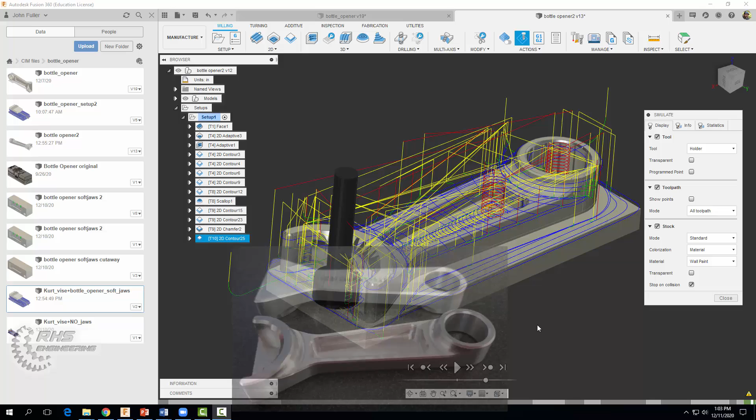Hey everyone, welcome back. In our last video, we learned how to manufacture the bottle opener seen here with our first setup. In this video, we're going to carry on where we left off and start a second setup to remove the material here along the bottom of our part, engrave our text, and add some chamfers here along the bottom. So let's go ahead and get started.

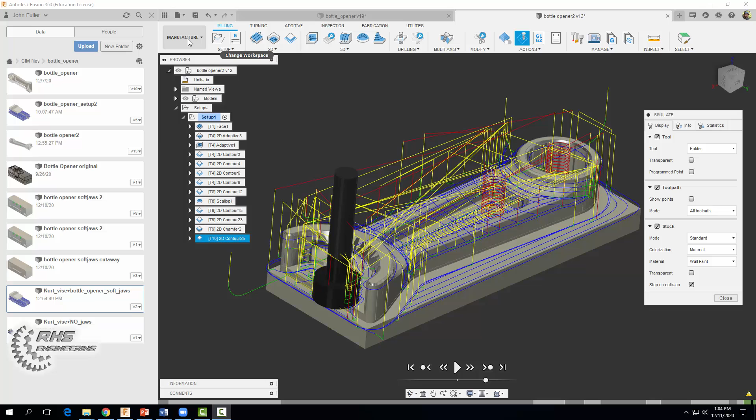The first thing you want to do is come back up to design. We want to make sure that our sketch where we engraved our text here is visible. So I'm going to check this eye right here so we can see the text along the flat surface here of our bottle opener.

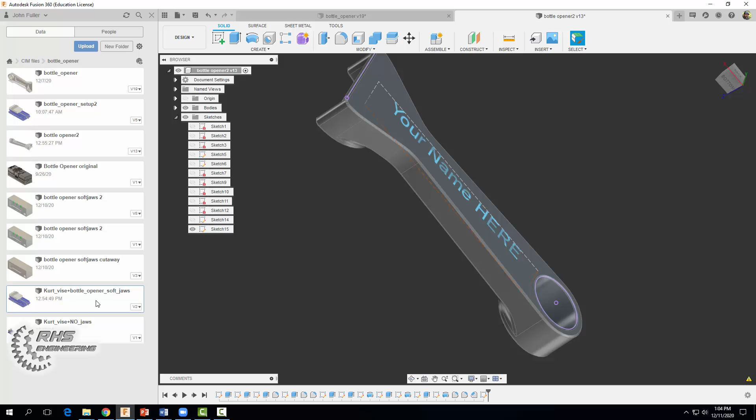Now, the next thing you want to do is come over here, download and open up our Kurt vise bottle opener soft jaws. So I'm going to go ahead and double click on that now.

All right, once your file is open, let's go ahead and bring in the bottle opener file here. So I'm going to right click, insert into current design. And I'm going to sort of move it into position here.

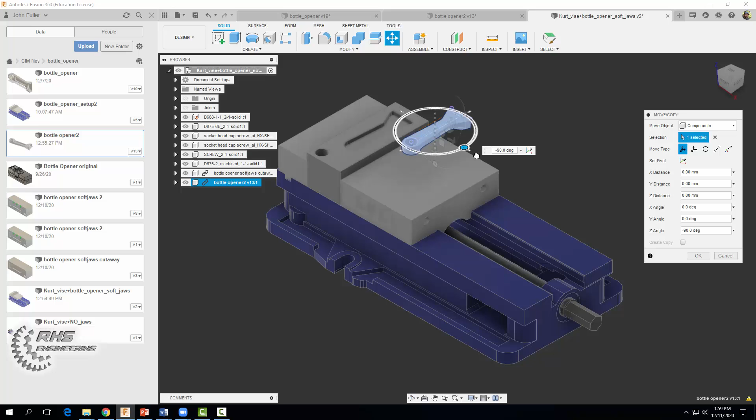I'm going to flip it in this direction 180 degrees and then rotate it around here 90 degrees, and I'm going to sort of place it so that it looks like it's going to fall right into the soft jaws. I'm going to move it up though just a little bit.

Hit OK. Okay, so listen carefully please, because if you don't assemble this properly, it may affect the outcome and quality of your part. So let's go ahead and assemble this.

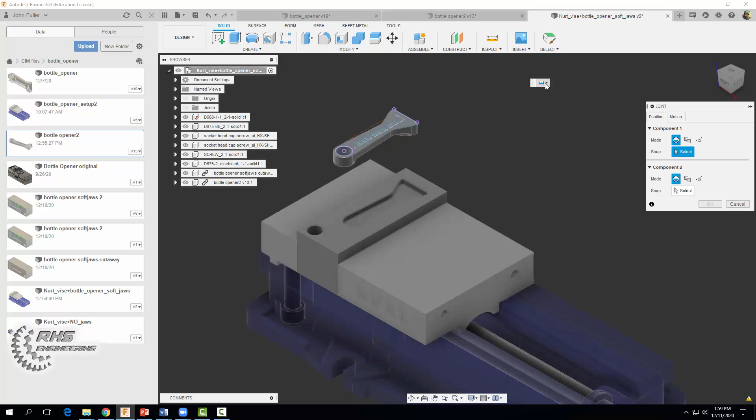We're going to go to joint. We're going to make sure rigid joint is selected, and I'm going to kind of zoom over under the bottom here, and please be careful.

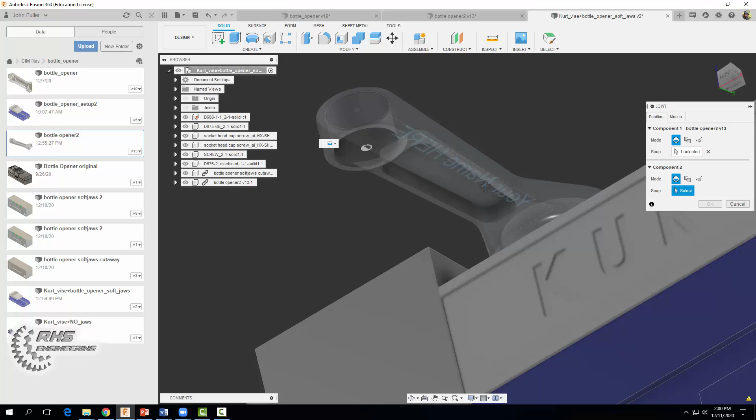You don't want to select this circle right here. You want to select the very bottom circle of your part. So we're going to select there, and this point right here, we want it to match up with this sort of semicircle point right here. So I'm going to go ahead and click there, and it should fall right into place, and then if it does, go ahead and select OK.

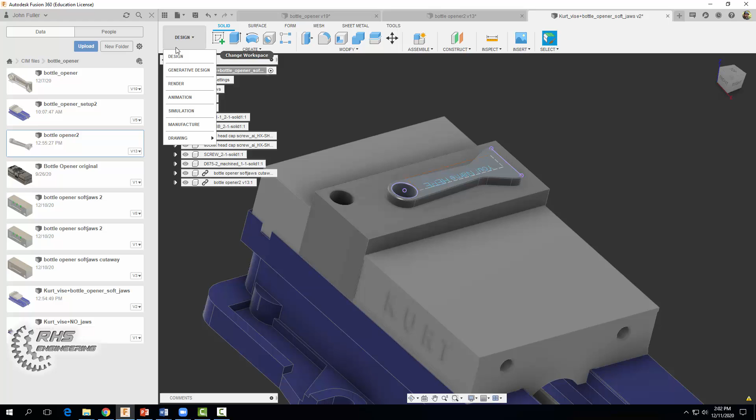Once that's done, come on up to design and change your workspace now to manufacture. We're going to start a new setup. We're going to come on down to model, and we're going to select our bottle opener, and then we're going to change our origin to selected point, and we're going to select this circle.

Okay, and our X and Y are backwards here and reversed, so we need to change them. So we're going to come on over to orientation, we're going to select X and Y axes, and we want this line right here to represent our X direction.

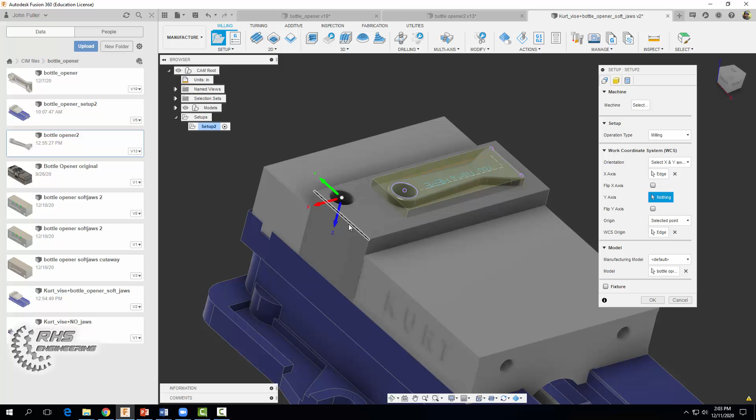So we're going to click there, and now it's asking for our Y axes, and we want this line to represent our Y axes, and they're still reversed, but that's okay. We can come on over here and flip them, and this looks good.

So if you set everything up correctly, remember our positive X should be going to our right if we're facing our part, and our positive Y should be pointing away from us, and our positive Z should be pointing up.

All right, now let's come over here and change the stock now. Okay, so we're going to change our stock size, and we're going to change our mode to fixed size box. Our width is 4 inches, or X. Our depth, or Y, is 1.5 inches, and our height, or Z, is now 0.75.

We're going to change that to 0.73 inches, not 0.75, because if you remember from our previous setup, we shaved off 0.02 inches in that first facing operation. And then we're going to change our model position here, offset from -Z, a distance of 0. Okay, and then we're going to select OK. All right.

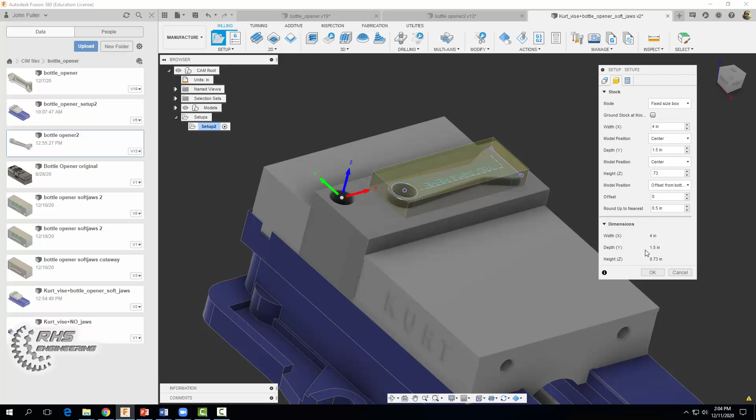I'm going to go ahead and close my data panel. Now that our setup is done, we can go ahead and start our first toolpath operation.

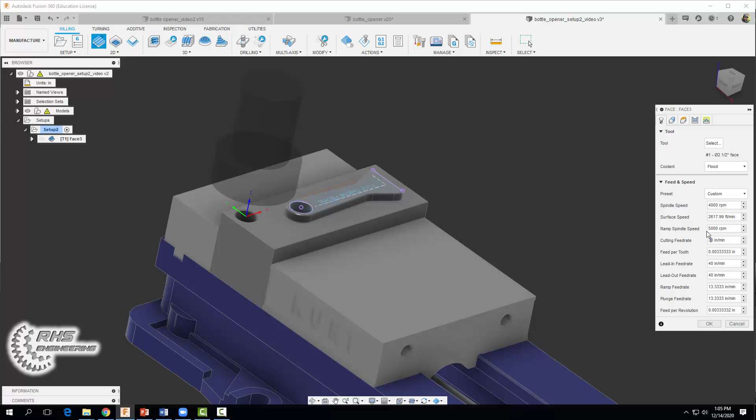Come on up here, we're going to select a 2D facing operation. We're going to select our tool, which is in our bottle opener tool library. We're going to select the 2.5 inch face mill. Go ahead and hit select. Set our coolant to flood. Our spindle speed is going to be 4,000, and our cutting feed rate is going to be 30. For our geometry, we're just going to select the top surface of the part.

I'm going to zoom in now so you can see it. That guy right there.

Now for our passes tab, I'm going to set our pass extension now to 1.5. We're going to check multiple depths, and we're going to set our maximum step down here to 0.08, and go ahead and select OK.

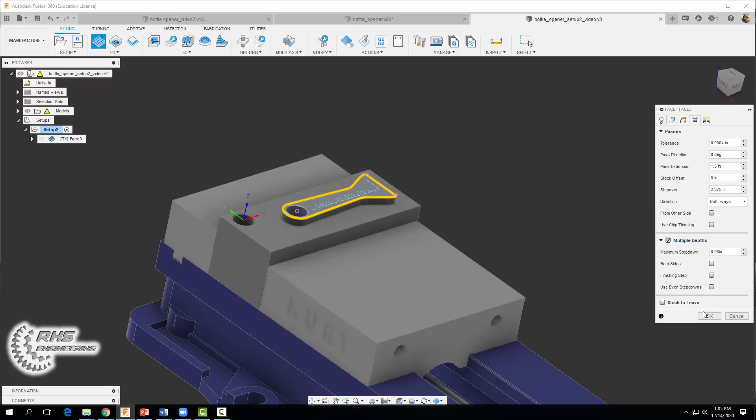And you should end up with the following toolpath. Alright, so now we want to go ahead and add these chamfers along the exterior of our part in the center of this hole. So let's come on up and do a 2D contour.

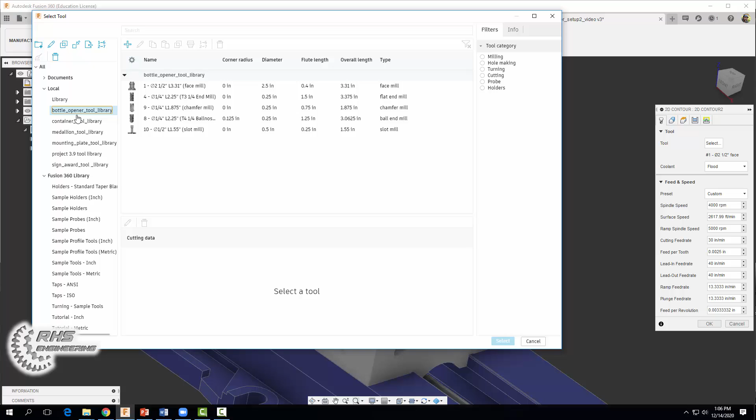Change our tool now to select our bottle opener tool library to our 1/4" chamfer mill. Go ahead and select that guy. We're going to use a spindle speed now of 3000 and a cutting feed rate of 30 inches per minute.

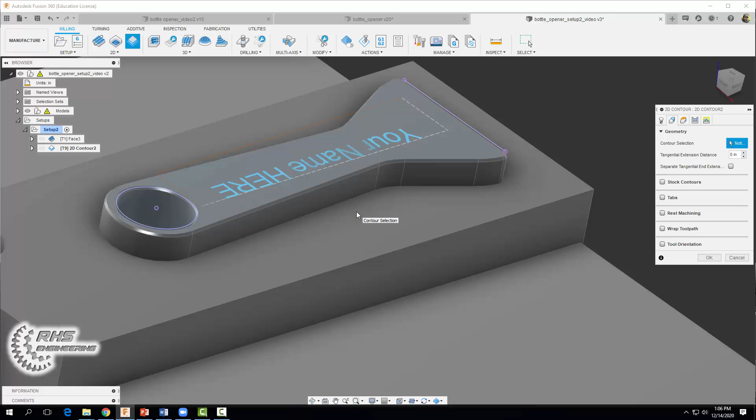For our geometry now, we're going to come on up here and we are going to select not this top one, but the bottom contour here, and the same one here. Not this top one, but this bottom one right there.

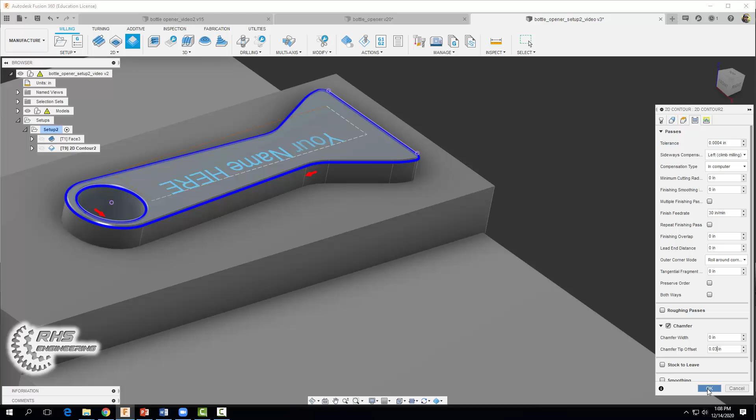And over in our passes tab now, we want to set our chamfer tip offset as the same one we used before, which was 0.03 inches. And once all that's done, go ahead and select OK. Hopefully you get the following toolpath.

And the last thing we want to do for our second setup is to engrave our text here. So whenever you're ready, come on up and let's do our last toolpath operation.

We're going to select 2D trace. We're going to keep our same tool. We're going to trace with our chamfer mill with that sharp point. We're going to set our spindle speed to 3000, our cutting feed rate to 30, but in our geometry tab here, we're going to come on over here, we're going to select that text.

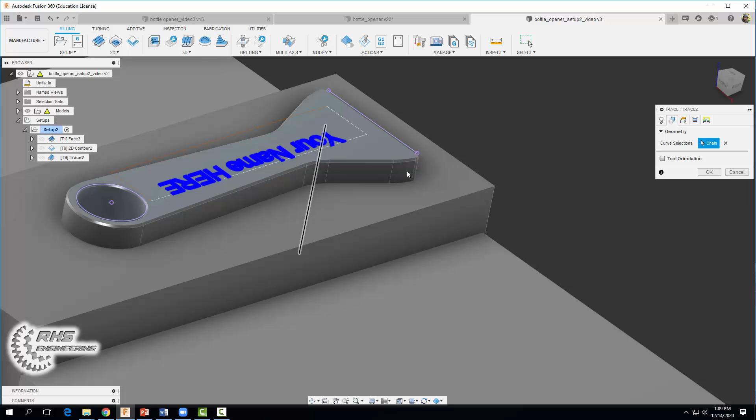And then we're going to come over to our passes tab, and we are going to set how deep we're going to cut or engrave. We're going to set that to 0.01 inches. Make sure your chamfer box is checked. Go ahead and select OK.

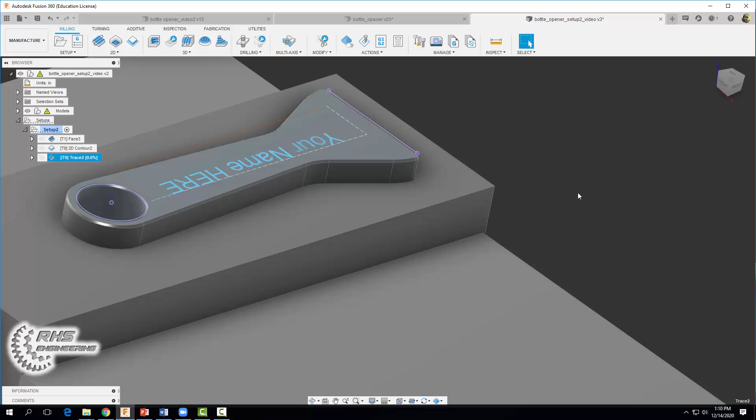Now that we're done with the second setup, let's go ahead and, as we always do, simulate the entire operation. Check the stock. Let's check our facing mill. Comes down and removes it 0.08 inches, layer at a time.

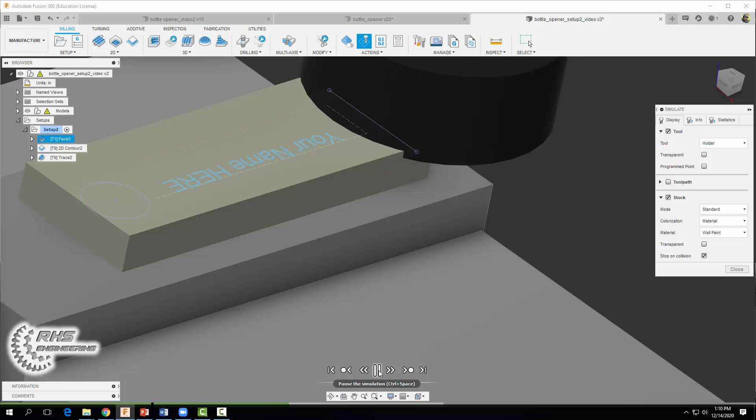And then we have that chamfer being applied. The inside of the hole, and then our text is going to be engraved here. All right, that looks pretty good.

When you're done, obviously it's going to vary because, well, you're going to have different text here, but hopefully your overall machining time is right around 2 minutes or so.